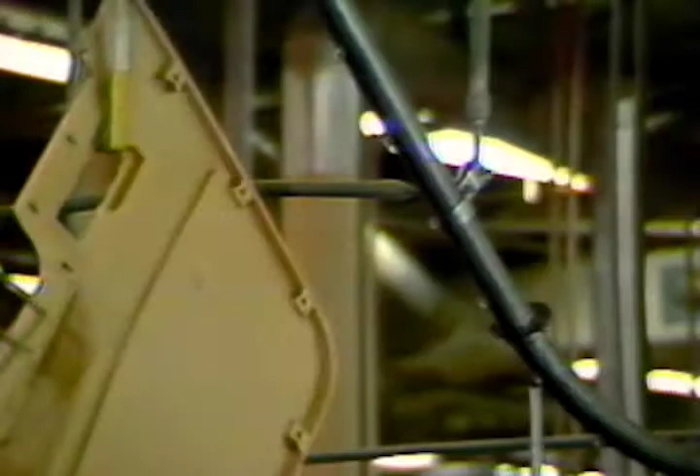Car doors and cardboard boxes, TV sets and table frames, plywood chairs and parcel post, utility meters and steering wheels. Whatever it is, if it has to be moved by conveyor, it's moved most efficiently by Bridgeveyor. The unique Bridgeveyor overhead conveyor system.

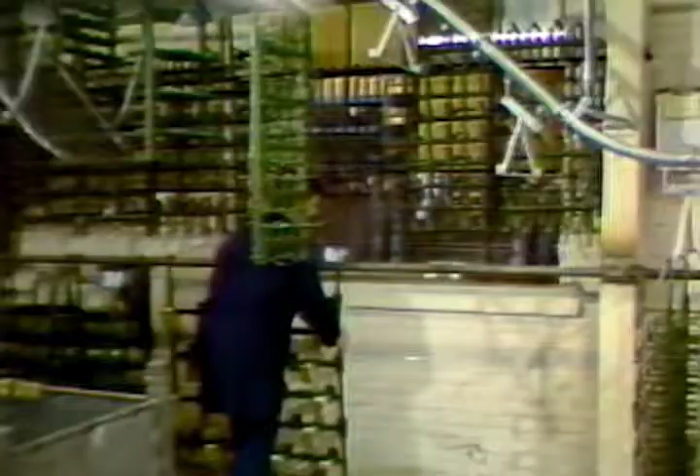Today you'll find Bridgeveyor systems at work in hundreds of installations in Canada, across the United States, in Great Britain, in Europe, and in Asia. And the list of Bridgeveyor customers reads like a who's who of industry. Ford, Volvo, Sangamo, Northern Telecom, Canadian General Electric, Seagram's, Rolls-Royce, Chrysler, Sklar, Canadian International Paper, Black & Decker, Electrolux. The list goes on and on.

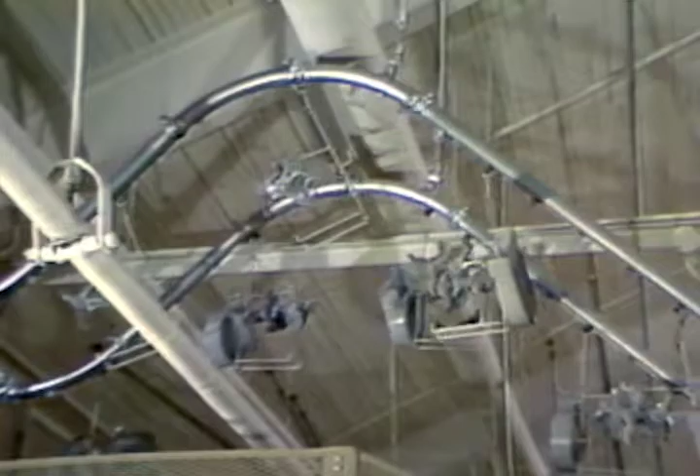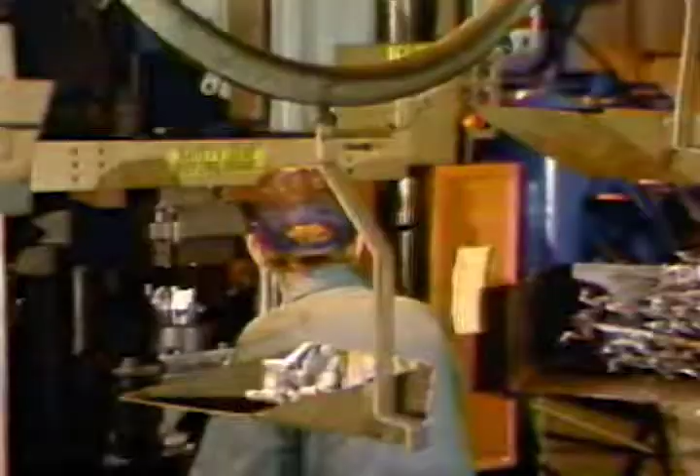The success of the Bridgeveyor system, the reason why it has been accepted by so many major companies on an international scale, begins with two basic facts. First is the concept itself. The concept of an overhead conveyor system as compared to any other method of moving materials and products from one point to another. This overhead concept saves you valuable floor space. It can be applied to virtually any industry, from the biggest manufacturer to the smallest plant. And it handles all types of materials, through all kinds of processes, so efficiently, in fact, that most systems pay for themselves in the first year.

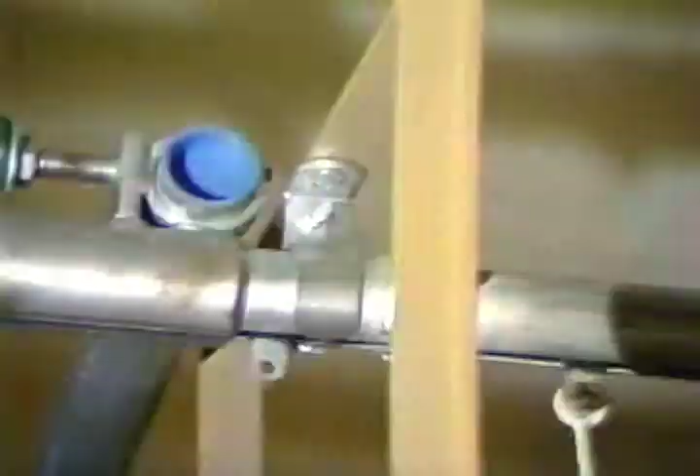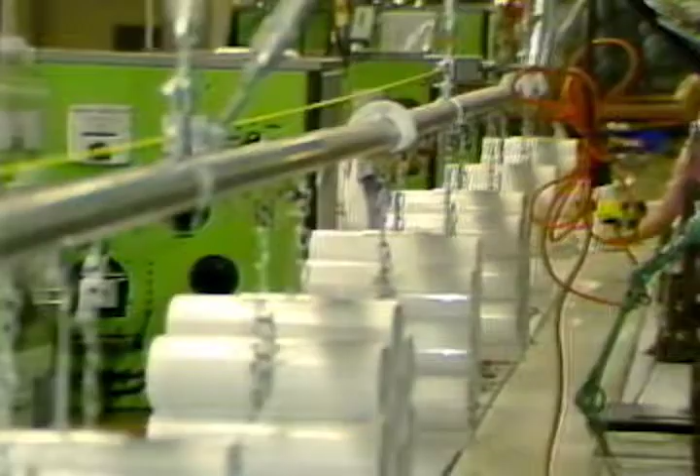The second advantage of the Bridgeveyor system is its unique design. It's a modular system, so simple to install that a customer's own personnel can readily set it up and get it running. It features a unique enclosed track. Chain and bearing surfaces are protected from contamination, dirt, paint, chemicals. This means less maintenance and longer life, and a better return on investment.

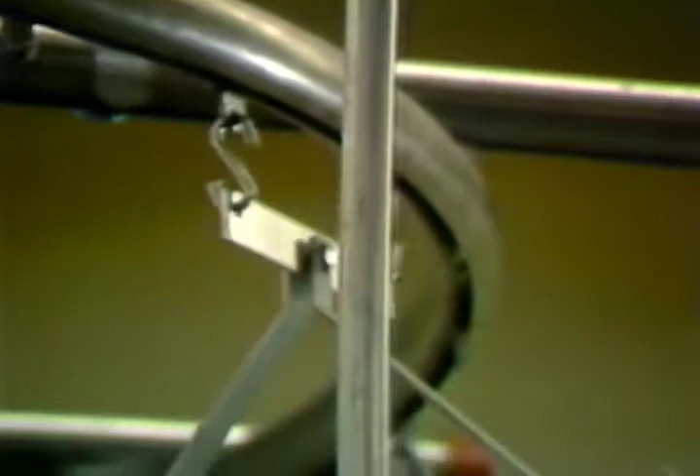The enclosed track also eliminates the need for idler wheels and sprockets on corners. Again, lower costs and less maintenance. And thanks to this enclosed design with no corner sprockets, the risk of injury to plant workers is eliminated.

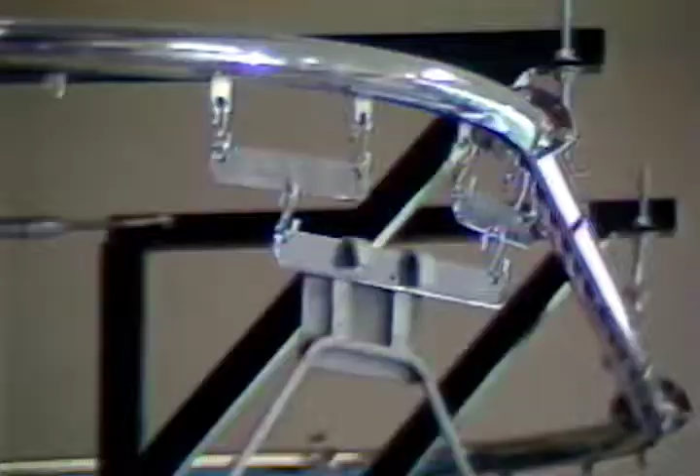Flexibility is important too. Horizontal curves can have standard radius from 36 inches all the way down to 9 inches, so processing tanks, ovens, or freezers can be reduced in size. Special curve sizes are available to order, and many combinations of turns, horizontal and vertical, can be built into your system to make it practical in even the tightest space.

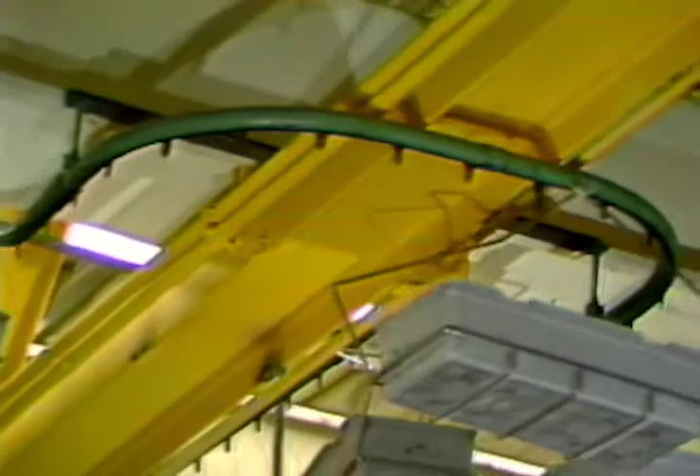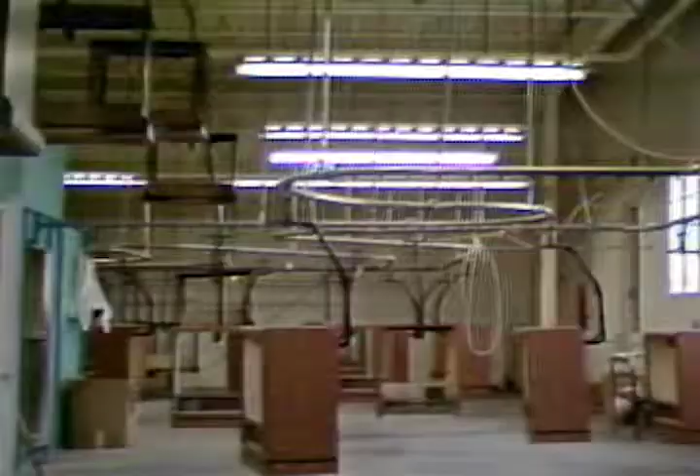Now, how about load capacity? The Bridgeveyor system comfortably handles up to 50 pounds to each pendant. You can double each load to as much as 100 pounds by coupling 2 pendants, or take 200-pound loads by using 4 pendants. So the system's able to handle just about any job you ask of it, right up to a total of 30,000 pounds on a 600-foot system with just one drive.

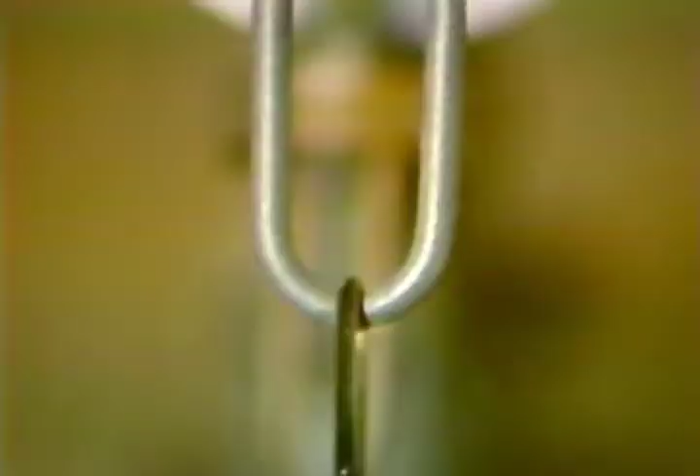Now look closely at the carriers themselves. They're designed to suit each and every application. Indexing carriers for painting, for example. S-hooks. Rotating carriers. Automatic drop-off units. Custom designs to suit your needs. Whatever the material, Bridgeveyor can handle it.

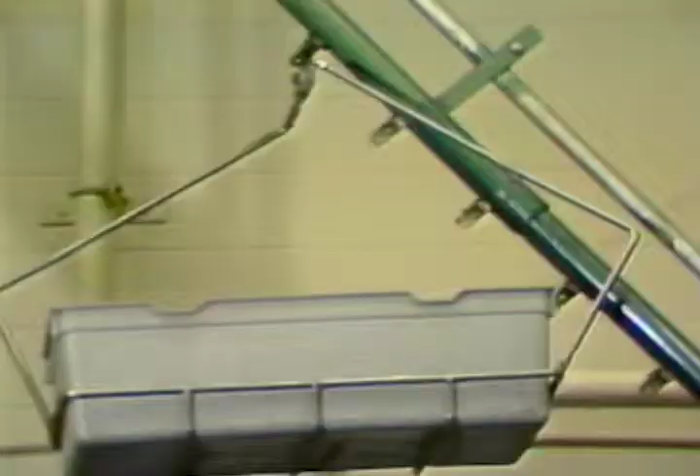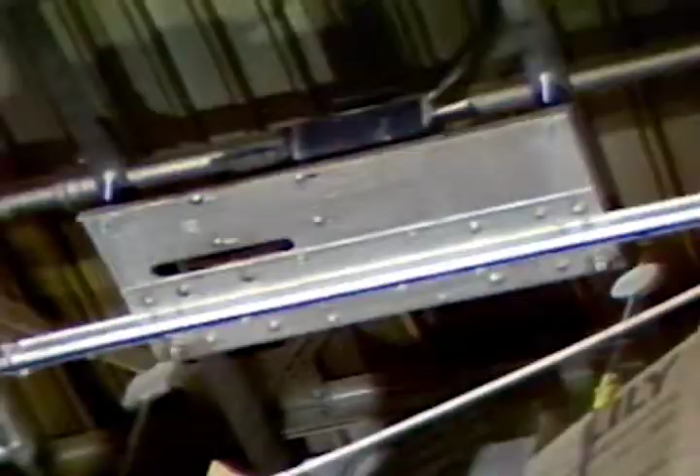Power for the Bridgeveyor system comes from this dependable straight-line Caterpillar D400 drive unit with a chain speed range of up to 80 feet per minute. The drive can be positioned on any straight section of track, wherever most convenient for service and maintenance, as long as it's at the highest possible point. When track length exceeds the capacity of one drive unit, multiple drives can readily be installed, equally spaced through the system.

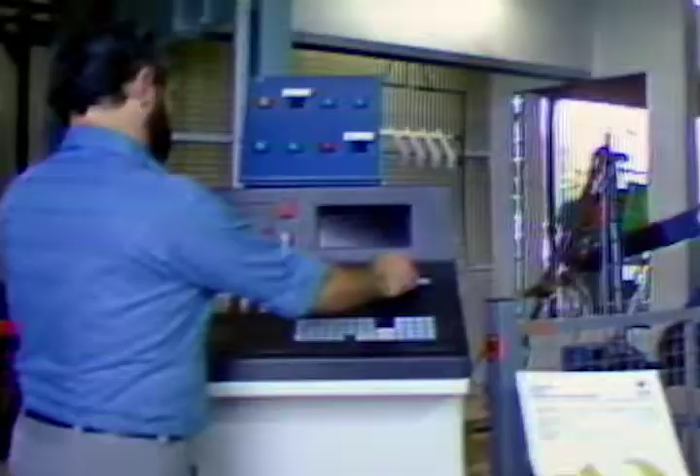Forward, reverse, variable speed, even automatic programming by computer. All these control options can be built into the Bridgeveyor system. Again, flexibility is the objective.

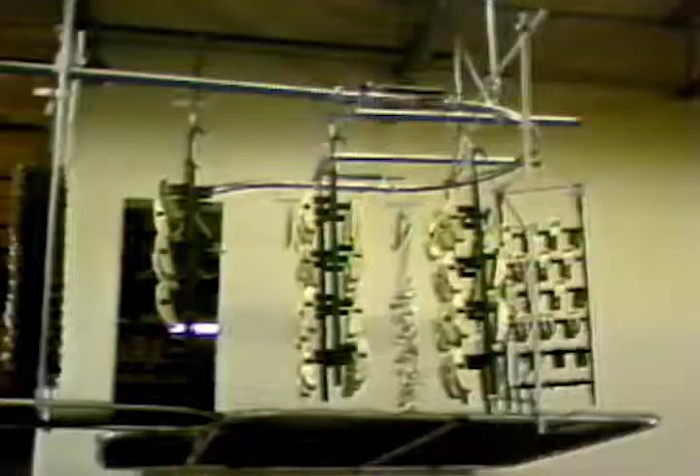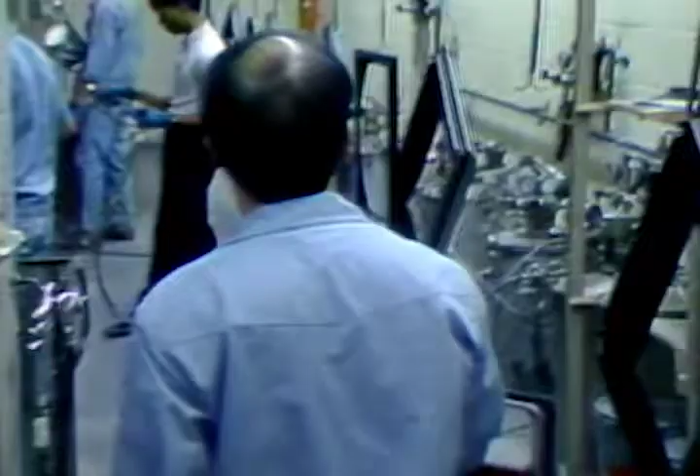And now still another outstanding feature of the Bridgeveyor overhead conveyor, the take-up assembly. Positioned following the drive unit, the take-up maintains a uniform chain tension throughout the system, even where the chain is exposed to the heat of ovens or the cold of freezers. The results, a smooth, free chain flow and minimal operating headaches down the road.

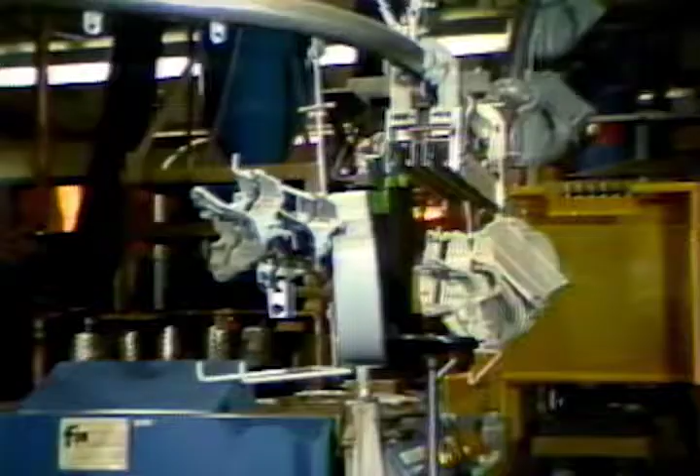So this is the Bridgeveyor conveyor system. Economical, flexible, dependable, and proven for efficiency in literally hundreds of applications. So, only one key question remains. Can Bridgeveyor work for you? The answer's yes. Whether you're looking for process handling, mobile storage, finishing systems, materials transportation, or interdepartmental delivery.

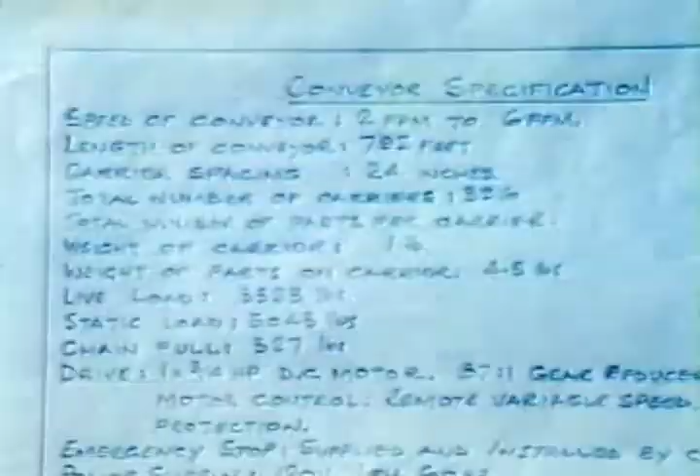It all starts with a Bridgeveyor expert analyzing your operation and your needs. Volume, speed, type of materials, length of system, clearances, environment, plant configuration. Every detail, right down to chain pull factors, is studied, assessed, then taken into account in the design recommendation. Once the costs have been approved, working drawings are produced and agreed on.

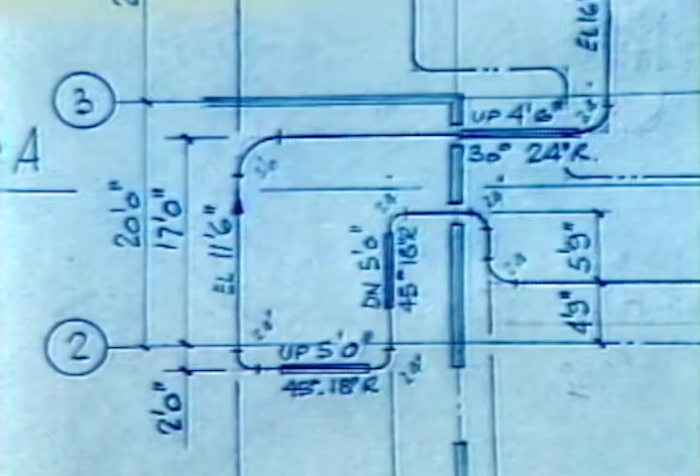The prefabrication of the system components is carried out using our unique bolt-together construction to save you time and money at the site. Finally comes the installation itself, by Bridgeveyor technicians or by your own plant personnel. Whichever method you decide on, you're protected by a full 1-year warranty on every component in the system.

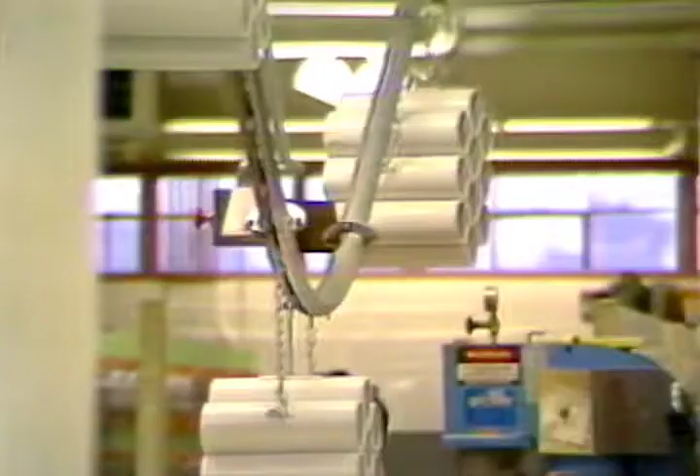So, whatever your industry, whatever your need, look to Bridgeveyor to move your materials better. Bridgeveyor, Canada's #1 overhead conveyor system. For proof, let's look at a variety of actual Bridgeveyor installations.

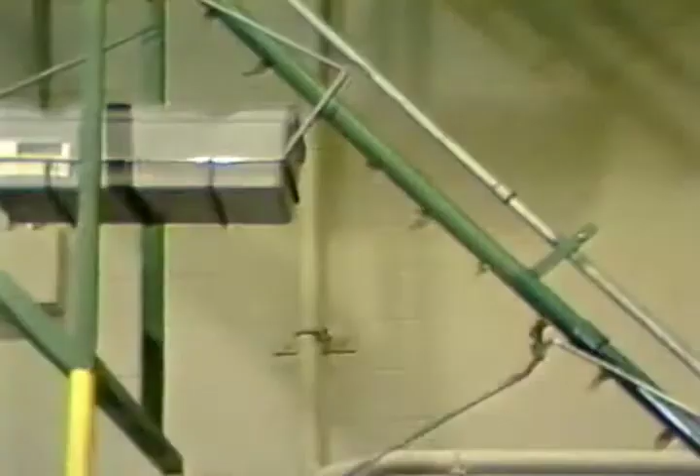Bridgeveyor conveyors have been installed in many of the major postal facilities across Canada. In the Canada Post Gateway Depot in Mississauga, as well as the South Central Depot in Toronto, the Bridgeveyor conveyor system has been operating 24 hours a day, 7 days a week, problem-free since 1976.

At the receiving docks, mail designated for one of Gateway's 36 sorting stations is placed on a floor dolly and moved by conveyor into a monorail system. These flat carts are programmed prior to being fed to the monorail. The coding is done using easily adjusted sliding pins, which engage limit switches to activate the Bridgeveyor conveyor at the required station or truck loading platform.

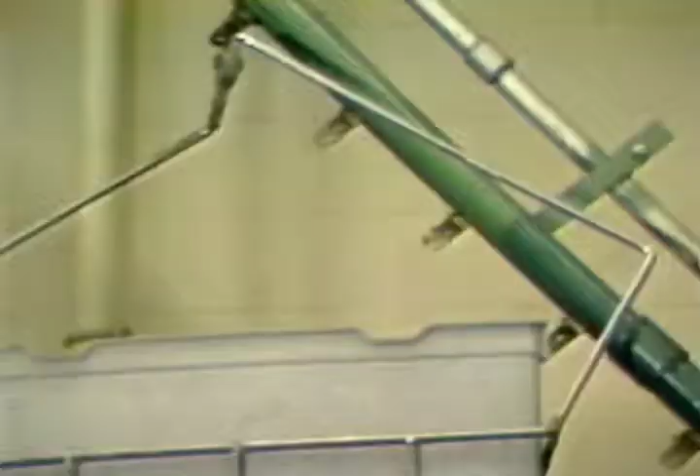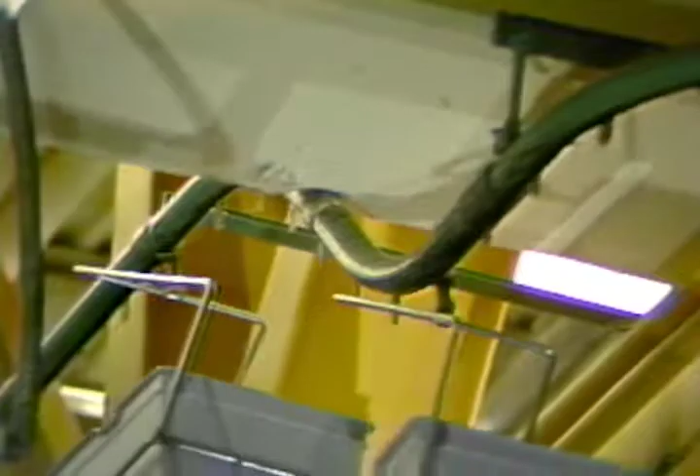Bridgeveyor has specially designed metal frame carriers which allow plastic tote boxes to move freely through various angles and 45-degree curves found throughout the long multi-level system inside the Gateway Depot. Tough layout requirements within the plant were no problem for the Bridgeveyor engineers, as use of tight radius horizontal and vertical curves move the conveyor around any obstacle. Since no corner sprockets are necessary, working conditions are made even safer for employees.

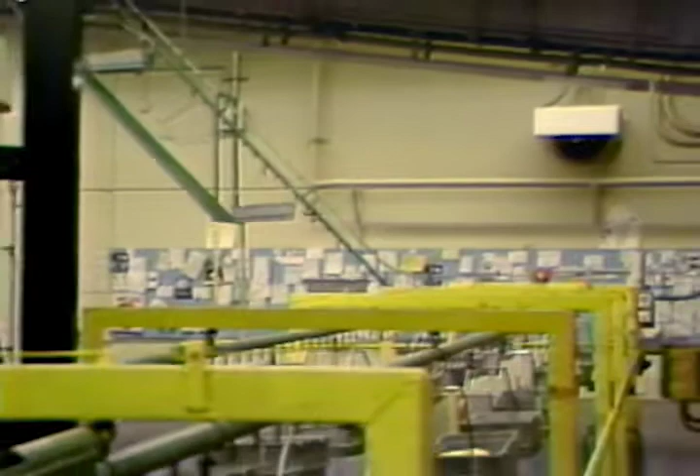Wire mesh is suspended beneath the conveyor to meet Canada Post safety requirements. The drive unit provides a smooth, uninterrupted conveyor flow throughout the system. The Bridgeveyor conveyor system has increased productivity and provided Canada Post with years of trouble-free service.

The Bridgeveyor conveyor system has been operating successfully in this Lily Cup plant since 1982. The key to the success of this overhead conveyor is the valuable floor space left available for other requirements in the plant. Since the conveyor allows the worker to handle only individual boxes rather than bundles as previously required, working conditions have become even safer. The 1,100-foot system moves around corners and negotiates horizontal and vertical curves and inclines with ease, transporting cartons from one department to another.

The numbers positioned on top of each hanger indicate which size and type of carton is required, and the operator can easily attach the box to the specially designed carrier hooks. The smooth and uninterrupted chain flow uses two drive units, which are synchronized automatically by the control box. The speed of the conveyor can be easily adjusted to suit the required production rate.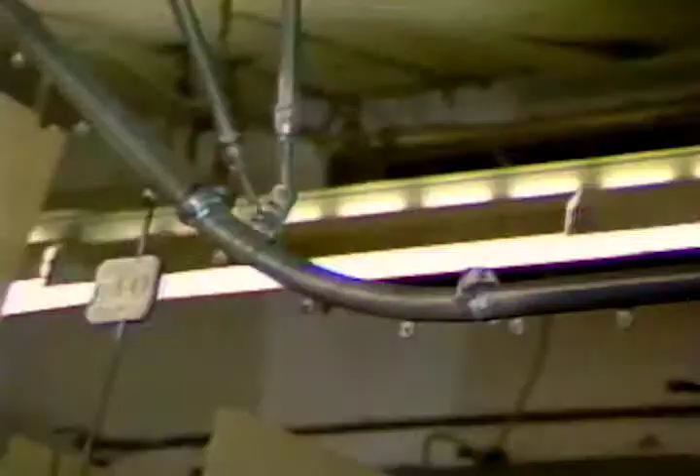The take-up units, which maintain an even tension of the chain, use a standard 36-inch radius, allowing the cartons to move easily around the turn and proceed through the doors in the ceiling. Where applicable, the conveyor is conveniently attached to the underside of the roof trusses, requiring no bracing and minimizing the number of steel hangers required to suspend the conveyor. The Bridgeveyor conveyor has been operating within Lily Cups throughout various shifts since 1982. It's been deemed such a success that our overhead conveyor system is now being considered by other Lily Cup plants.

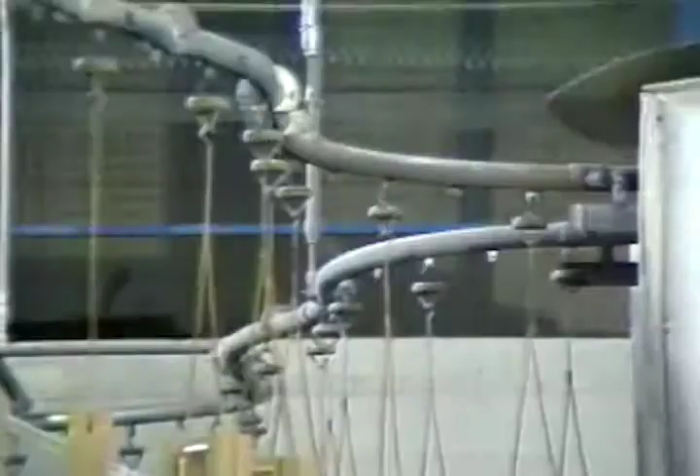The Matsushita Company of Canada installed the Bridgeveyor conveyor system in 1978 to increase productivity on their television cabinet assembly line. The original conveyor system was over 1,800 feet long, and over the years the company has added 3 additional conveyor lines, each powered by its own drive unit and totaling almost 4,000 feet of conveyor.

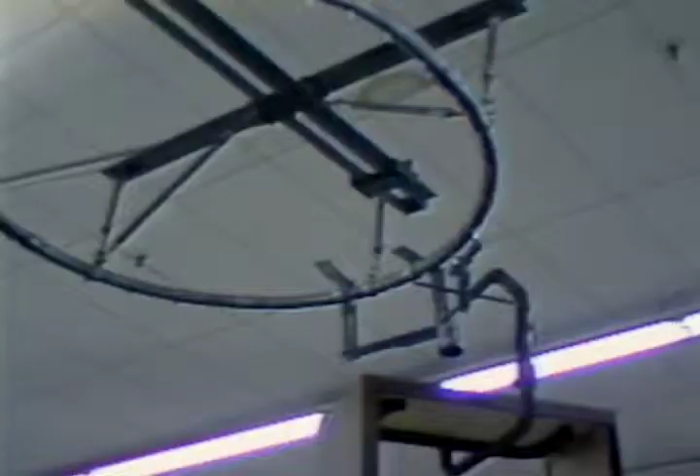The cabinet transfer line is 770 feet long. This conveyor automatically picks up TV cabinets from the cabinet assembly conveyor and moves them on specially designed rotating carriers up to the next floor, where they are placed on a storage conveyor. Conveyor number 2 is the cabinet finishing line and runs a total length of 2,300 feet. The TV cabinets are moved through 5 spray booths on rotating carriers, which ensure smooth and even painting.

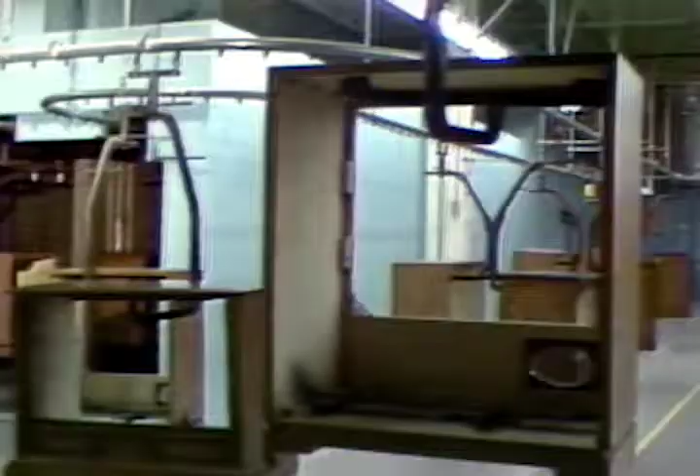After painting, the cabinets travel on the conveyor through an oven, which bakes the paint for 12 minutes at 175 degrees Fahrenheit. Exiting the oven, the conveyor moves the cabinets by automatic transfer to accumulation storage. Bridgeveyor's unique design minimized the surging factor in this 1/2 mile system and ensures a steady, even flow of the conveyor.

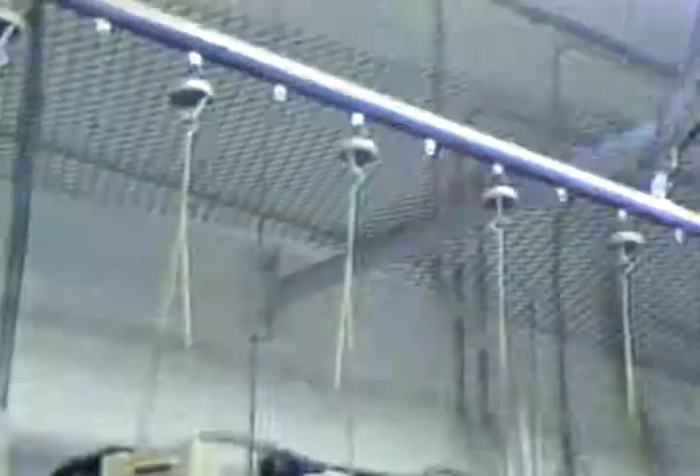The 400-foot paint line in conveyor number 3 is used for painting plastic parts used in the cabinets. Each rotating carrier carries 2 plastic parts through a fog tunnel, where the parts are sprayed with a water-soluble conductive solution, making the plastic conductive before it's painted. The conveyor and the carrier hooks are both grounded.

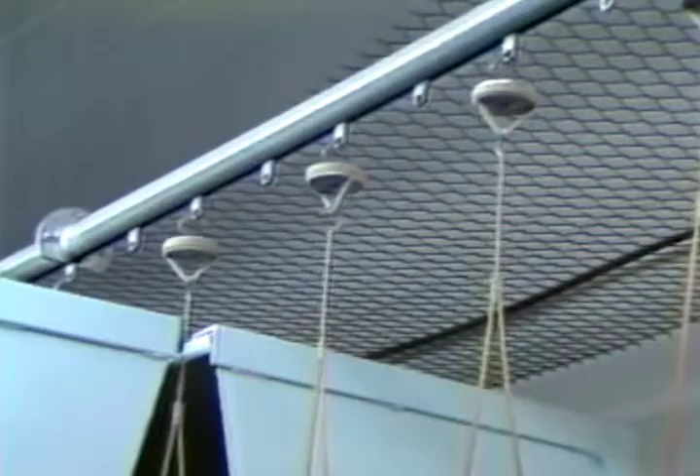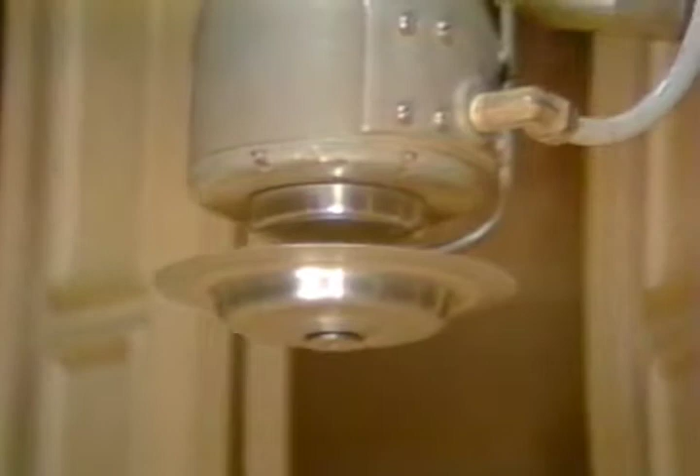The parts now enter a Ransburg paint booth. The paint is charged at 100,000 volts and is sprayed on the hanging parts by a high-speed rotating disc which moves up and down the length of the plastic part. The painted parts are conveyed through an infrared oven for final curing. This ceiling-mounted oven is used for the paint drying of conveyors 3 and 4.

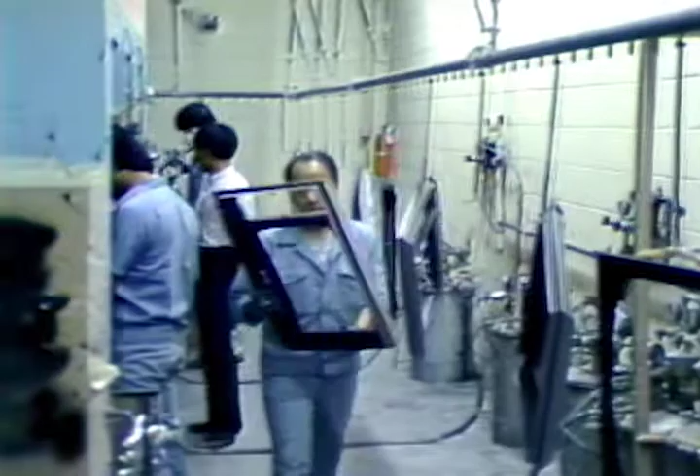Conveyor number 4 is the mask decorating line and is 500 feet long. It moves the plastic frames of the TV cabinets past 5 spray paint booths. Each spray operator removes the particular part he paints, fits it in the painting fixture, and places the painted part back on the conveyor, where they are moved to the infrared oven for drying. Bridgeveyor's enclosed track design is able to protect the chain and bearings from paint, chemicals, and ovens.

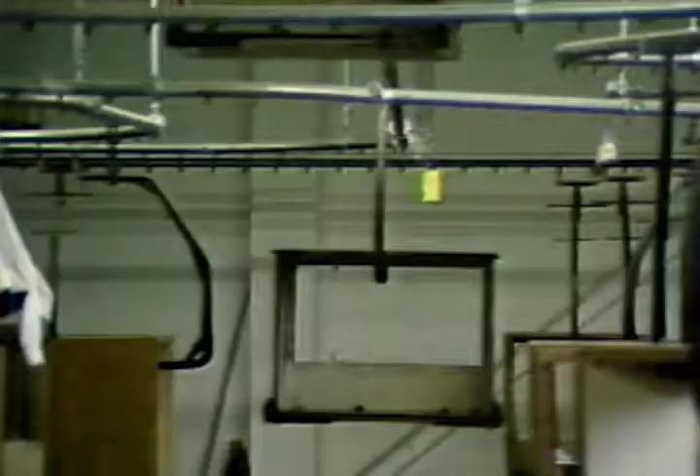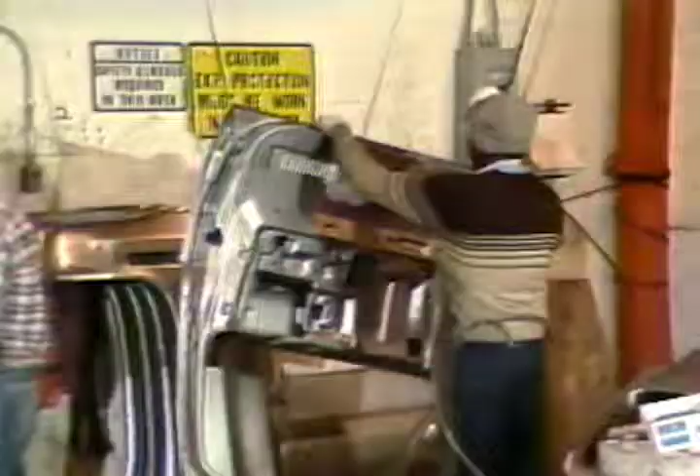The Bridgeveyor conveyor system has increased the overall efficiency at Panasonic so that their normal production rate has now exceeded 1,200 cabinets during each 8-hour shift. Bridgeveyor conveyor systems use an enclosed track design in which the conveyor track is able to move through corrosive chemicals, paint, and dust with complete protection. The success of this design can be seen in large automotive factories such as Chrysler and Citroën.

This Chrysler factory in Ontario supplies automobile door parts and panels to Chrysler plants in Canada and the United States. Valuable floor space is left available for other uses, such as packaging and assembly stations, as the automotive parts are carried through the plant on the overhead conveyor.

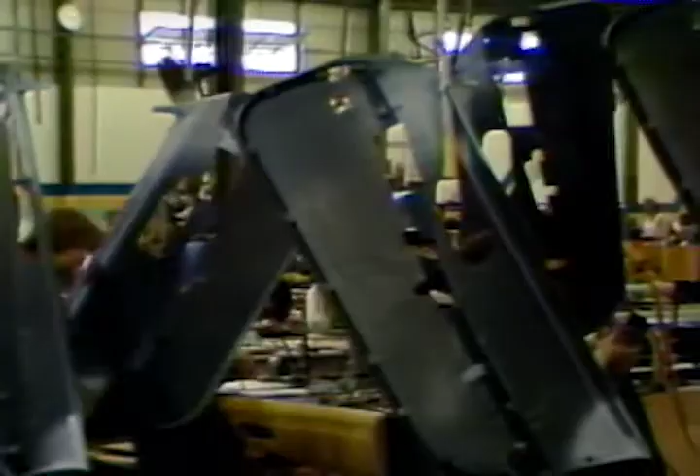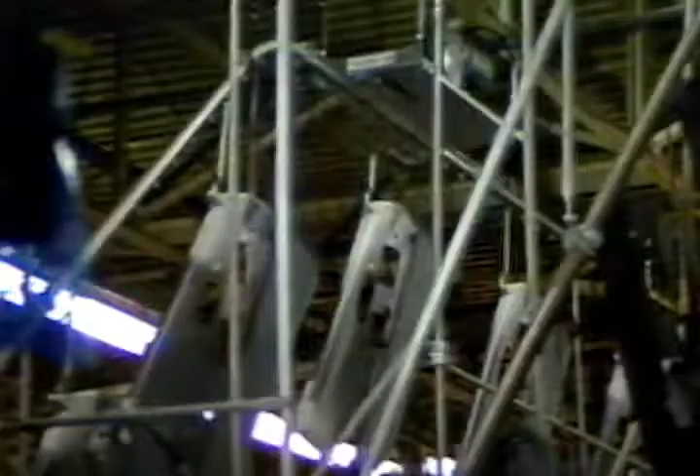At Chrysler, the conveyor system operates 5 days a week during two 8-hour shifts each day. The large door panels are conveyed easily around tight curves and steep inclines as they move by each required assembly station. The conveyor moves at a smooth, steady rate of speed, and the predetermined pace can be adjusted according to production needs. The Bridgeveyor conveyor system has been operating successfully in the Chrysler factory since 1983.

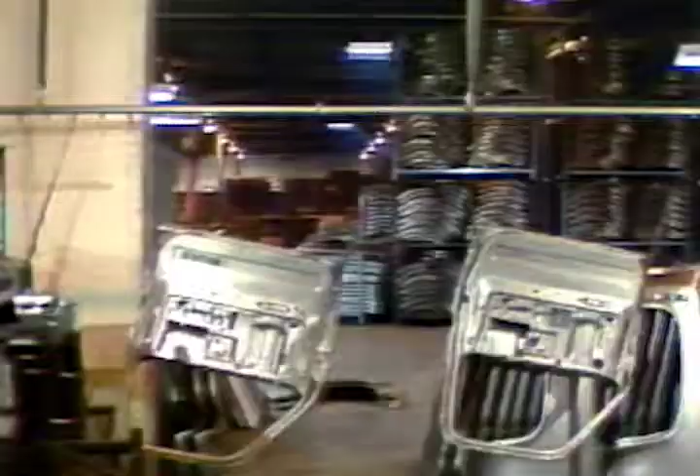The Citroën plant in Concord, Ontario, manufactures car doors, fenders, and hoods for such companies as Ford, General Motors, and Chrysler. The 1,500-foot conveyor moves at a predetermined production speed of 20 feet per minute. Citroën uses a multi-drive conveyor system with an electronic shear pin overload protection feature. The parts are conveyed through a 5-stage zinc phosphate wash and rinse cycle and then travel for 14 minutes in a 350-degree dry-off tunnel.

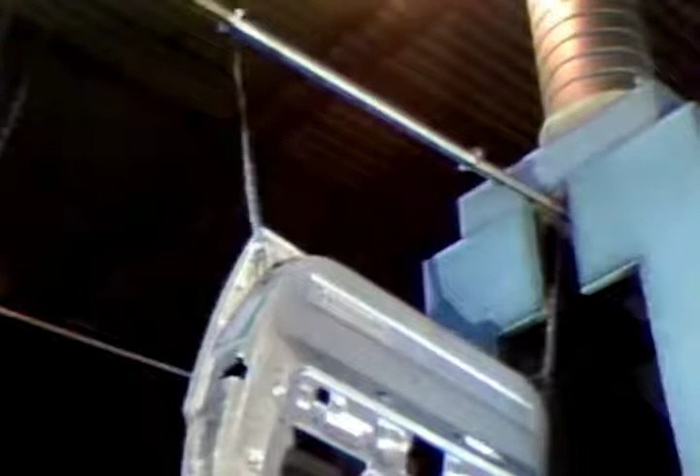The conveyor moves the parts from the tunnel to a dip tank where the parts are completely immersed in a primer coat of paint. These painted parts are baked as they travel through a finishing oven to complete their cycle. The Bridgeveyor system has improved safety conditions in plants such as Chrysler and Citroën, as well as increasing overall production.

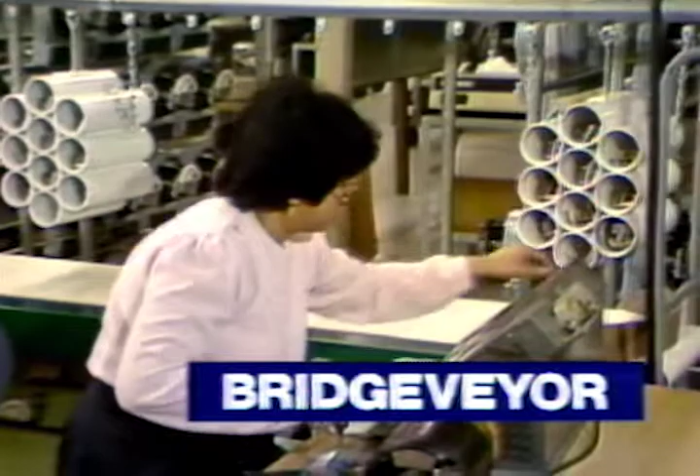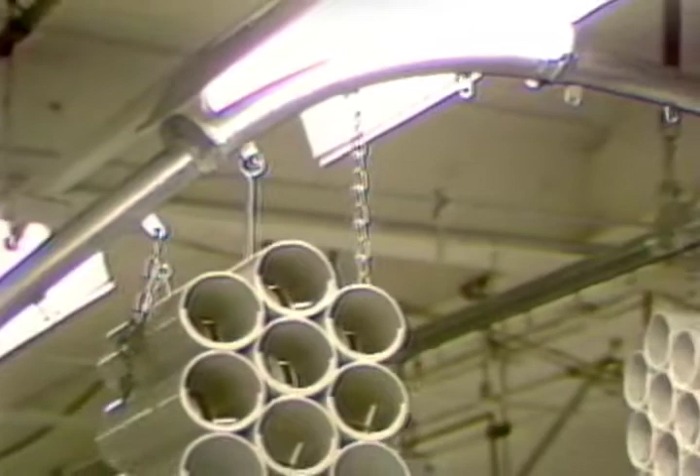Chosen because of its quiet, clean, and smooth operation, the Bridgeveyor conveyor system has been operating in Sangamo's Toronto plant since 1982. Supplying the Canadian market with electrical meters, Sangamo had the overhead conveyor system installed to improve the plant's overall efficiency. 4 conveyors operate throughout the Sangamo plant. On the final test and assembly conveyor, the meter parts are conveyed throughout the plant in a unique product carrier which was specially designed to suit Sangamo's needs.

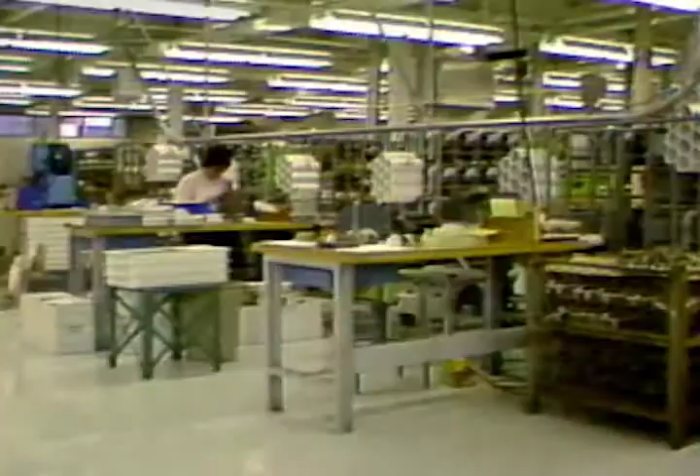The vertical curves use a small radius which makes it possible for the conveyor to dip down to individual workstations and then elevate back up and out of the way, freeing valuable floor space. These carriers continually circulate on the overhead conveyor, and operators at assembly stations remove various parts for testing. When the tested parts meet all of Sangamo's requirements, they are placed back on the product carrier in the specified slot and move on to the next station of assembly.

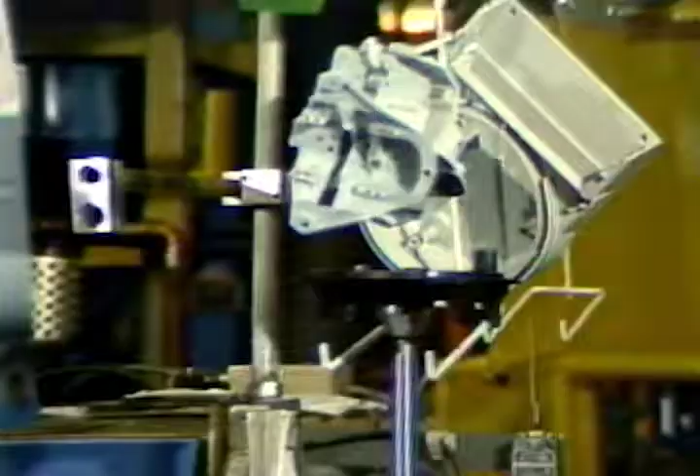The parts supply conveyor for meter assembly is 792 feet long and circulates 396 carriers. It provides assembly stations with a constant supply of meter parts. The die-cast conveyor moves parts from the die-cast department on specially designed carriers, which automatically drop the cast parts into a vibrator. The vibrator is full of sand and moves at an accelerated rate, smoothing and polishing the parts so that they are ready for assembly.

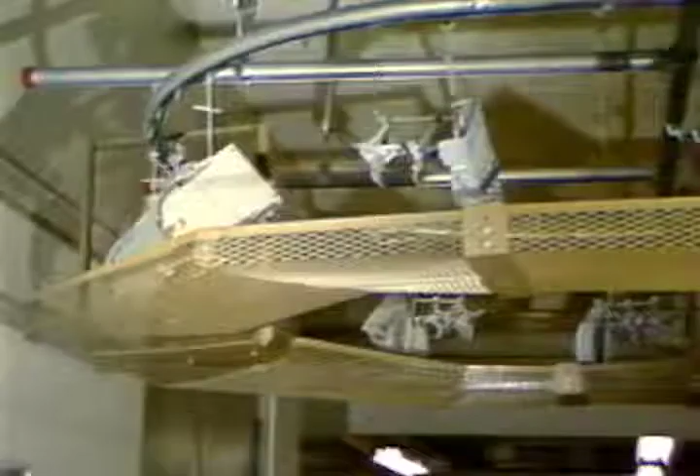A safety shut-off line has been installed along the length of each conveyor for the convenience of the operators. The conveyor track easily supports the wire mesh protecting the workers below. The Bridgeveyor conveyor, designed to meet all of Sangamo's production requirements, was installed quickly and easily. The prefabrication of the conveyor system eliminates the need for any welding during installation.

Right and left-hand threaded rods provide a turnbuckle for ease of leveling track during installation. Beam clamps adjust to different sized beams, and track hanger clamps are used for easy hanging and bracing of the conveyor track. The ease of design adaptability is evident throughout the Sangamo plant.

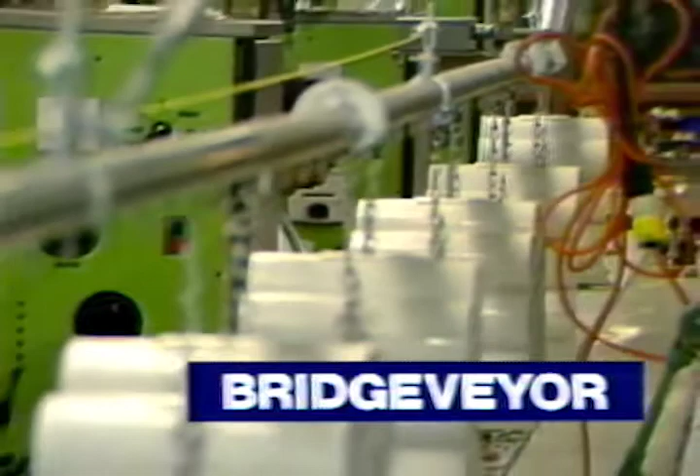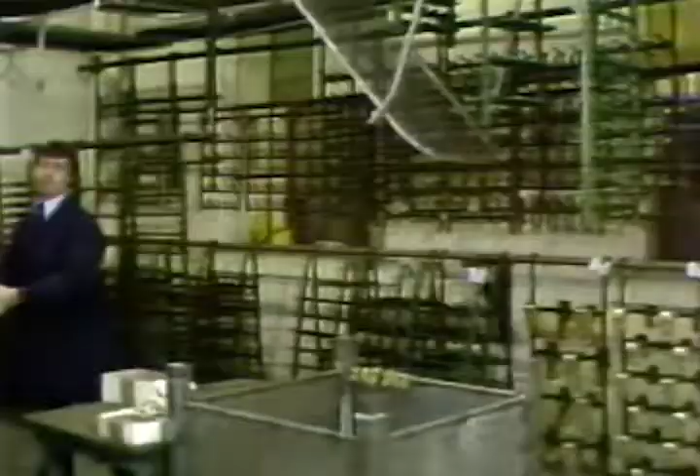The Bridgeveyor conveyor system has been operating in this Sargent's plant since 1979. The company plates industrial parts for doors and required Bridgeveyor to design a special carrier to move the door parts efficiently and easily. At the loading station, the parts to be plated are placed on the carrier, which is conveyed up a 45-degree incline to a door in the ceiling.

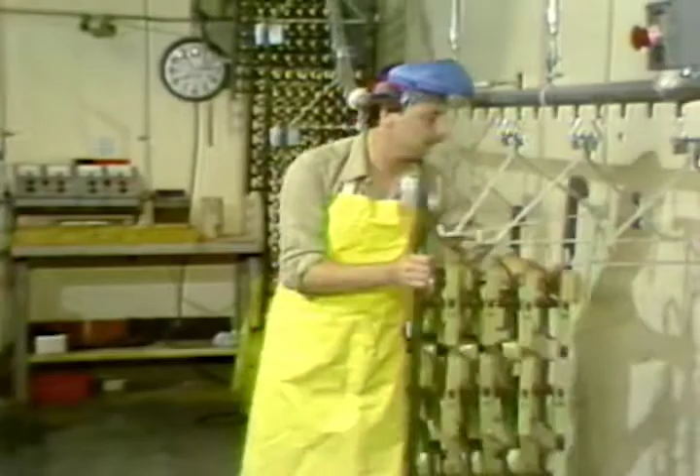In the plating room, the conveyor returns to floor level, allowing the operator to easily remove the racks. Several racks are placed on a rack hoist, which moves the racks down to plating tanks. When the plating process has been completed, the racks are then placed back onto the conveyor, where they proceed to the unloading and packaging station.

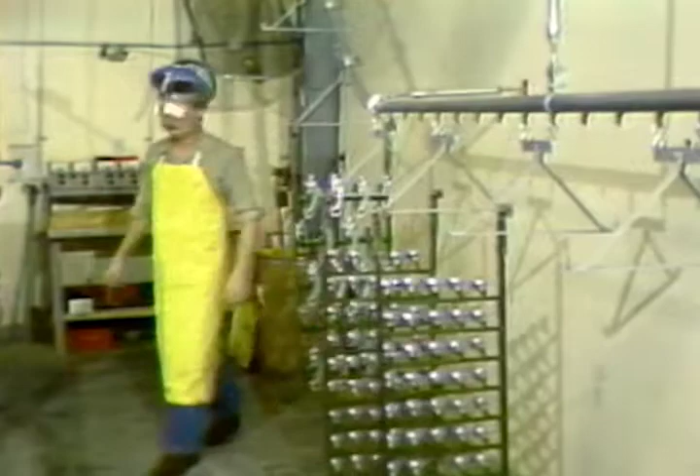The conveyor moves at a slow speed for the safety of the workers handling the parts. Bridgeveyor installed a safety wire mesh to protect the operators against any falling parts. The Reliance SCR variable speed control allows the conveyor's speed and direction to be changed manually.

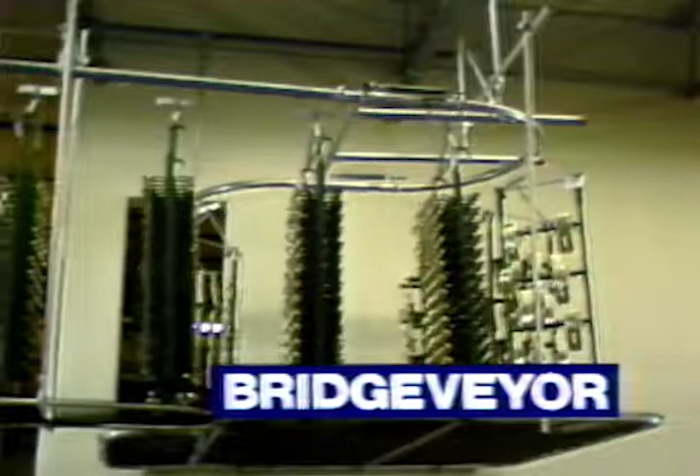The enclosed track design protects the chain from the chemicals encountered during the plating process at the Sargent plant. The Sargent's company has found that the Bridgeveyor conveyor has enabled their production capacity to handle any increases in production demands.

Curve Ply, Canada's largest manufacturer of curved plywood products, installed the Bridgeveyor conveyor system in 1980. Curve Ply uses two separate conveyor tracks for finishing, loading, and unloading purposes. One is 800 feet long and the other 400 feet, both moving at 6 feet per minute.

After being loaded on the specially designed carrier, the various wooden parts are sprayed with sealers or lacquers. Indexing carriers enable the operator to easily rotate the parts, ensuring a smooth, even coating. The enclosed track design protects the conveyor chain and bearings from contamination by varnish and dust.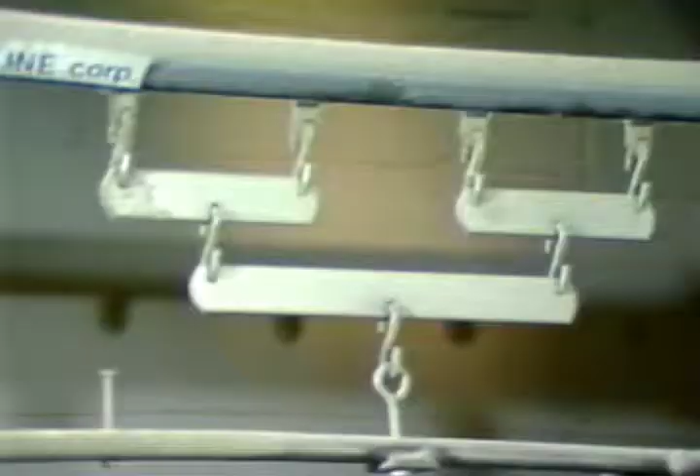Once sprayed, the parts travel through an oven where they are dried and baked at 150 degrees Fahrenheit. Large racks designed by Bridgeveyor to meet Curve Ply's unique needs are moved easily along the conveyor system and through the tight turn in the oven. The double four-pendant carriers enable the conveyor to move weights of up to 400 pounds.

Due to the low profile of the Series 250 conveyor, the oven size could be reduced considerably, saving Curve Ply space and costs. Prefabrication of the conveyor also saved Curve Ply time in installation, as no overhead welding was required. The overhead conveyor system leaves valuable floor space available for the large packing materials required at Curve Ply.

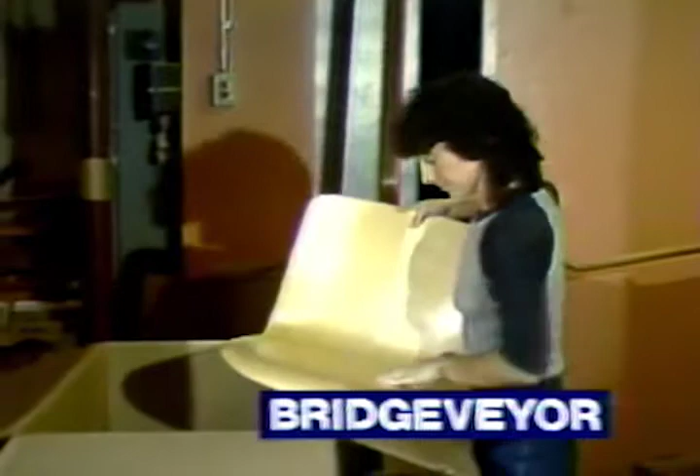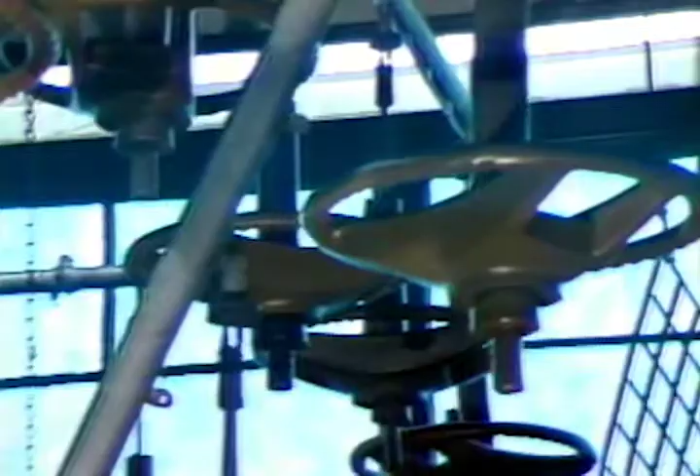Two Bridgeveyor conveyor systems operate within the Scheller Globe plant in Brampton, Ontario, where steering wheels are manufactured for major North American automobile companies. The systems are 700 feet long and operate side by side. They have been operating successfully since 1979, 24 hours a day, 7 days a week.

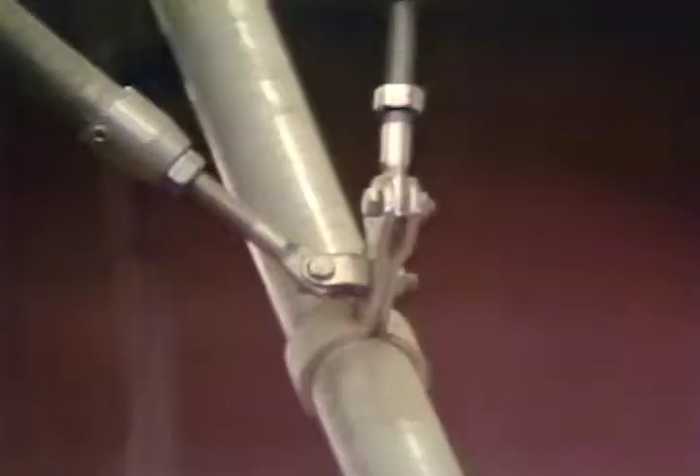During this time, Scheller Globe has repositioned and added equipment to their plant, requiring Bridgeveyor to change the flow of the conveyor several times. This was done easily and quickly because of the standardization design of the conveyor track connections. After passing by 3 loading stations, the parts are conveyed through an emulsifier spray tunnel. They then pass through a 150-degree 4-stage wash and rinse cycle and move on to a deionization water rinse and drying tunnel.

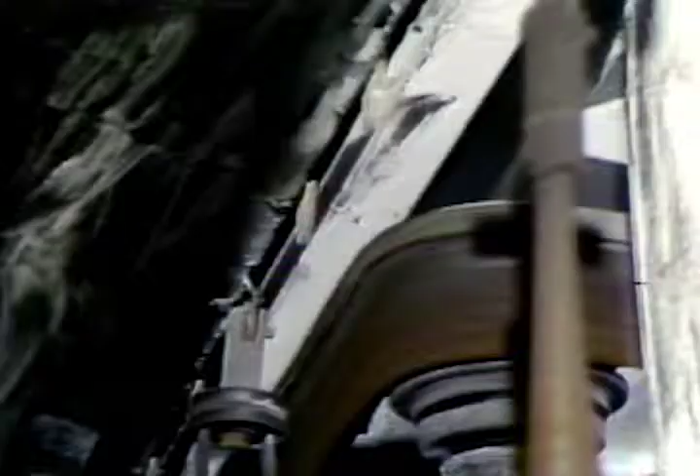The steering wheels are automatically rotated by a V-belt coming in contact with the rotating carriers as the parts are moved in front of the spray guns. The parts then move up a 45-degree incline and pass through a 450-degree oven installed on the roof of the plant.

The steering wheels are then conveyed back down to floor level for the finishing coat of paint and returned to the oven for final baking. The finished steering wheels decline to floor level for easy unloading and packing. A variable speed drive allows Scheller Globe to adjust the conveyor speed to meet their production requirements. The Bridgeveyor conveyor system was designed to suit the specific production requirements found at Scheller Globe and has increased their overall efficiency and production rate.

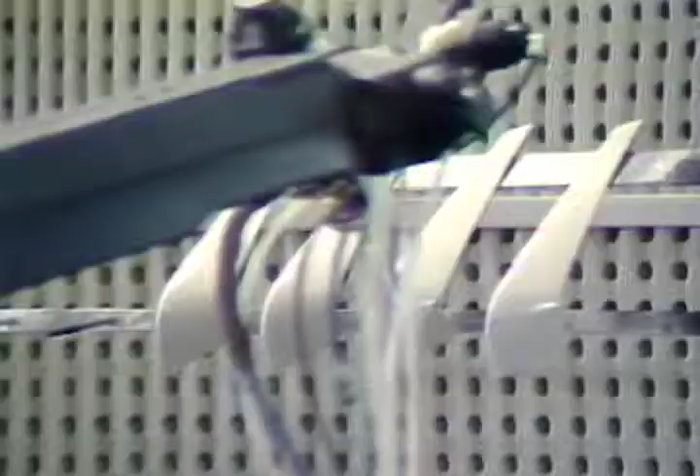The Ontario Robotics Centre in Peterborough uses the Bridgeveyor conveyor to move various parts past an industrial spray paint robot. The Bridgeveyor conveyor is able to interface with all industrial robots. The variable speed controller enables one operator to adjust the speed or direction of the conveyor according to production requirements. The enclosed track design protects the moving chain from paint and chemicals.

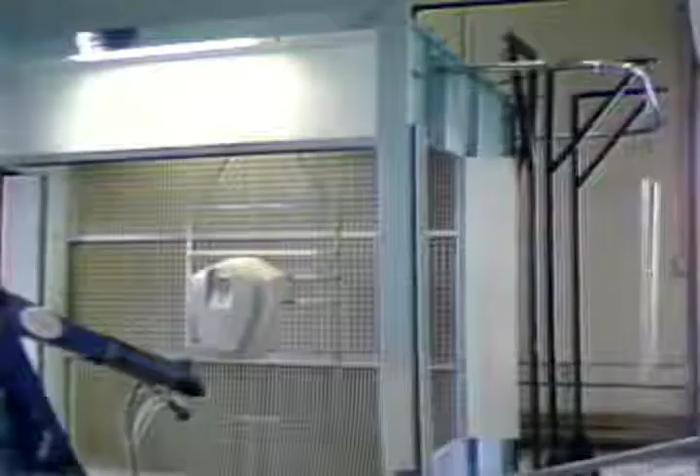The design of the drive unit and take-up assembly allows the conveyor chain to maintain an accurate pitch while minimizing the stretch factor. Easy installation and quiet, smooth operation make the Bridgeveyor conveyor ideal for all of the Robotics Centre's needs.

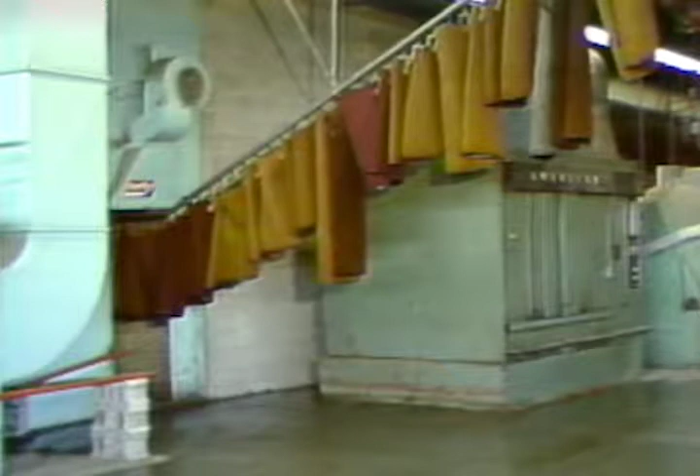In 1976, Bridgeveyor installed their overhead conveyor system in the Canadian dust control plant. One conveyor system is able to handle all of the plant's requirements as it moves soiled carpets at a low speed through a wash and dry cycle. Exiting the washer, the carpets are moved to an unloading area where workers remove the carpets from the conveyor. Specially designed carrier hangers enable the operators to load and unload the carpets easily.

The conveyor uses two drive units which are synchronized by a single V1600 remote variable speed AC controller contained in one cabinet. This facilitates load sharing for two or more D400 drive units located separately within a continual strand of Bridgeveyor chain, all of which are individually protected from any jamming situation with the use of an instantaneous trip relay or shear pin protection.

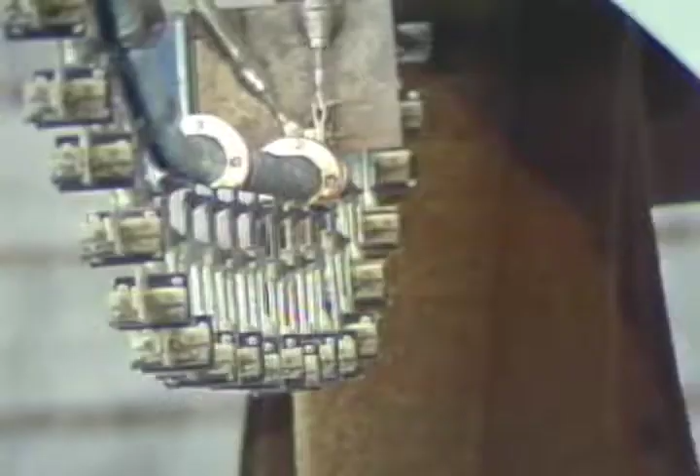Daily production output at the plant has been substantially increased by the use of a double-tier conveyor line. This line moves through 180-degree turns with very tight 16-inch radii within the dryer enclosure. This conveyor line design has allowed completion of the day's work to be reduced by as much as 3 hours from the usual 8 hours as in the past. The conveyor system has also eliminated the use of costly industrial washers and dryers, which were found to be slow as well as costly to maintain.

At the Woodhill Garden Centre in Toronto, the Bridgeveyor overhead conveyor is used as an eye-catching display unit. Installed in 1980, the conveyor moves a variety of plants along the length of the store for customers to view. The Garden Centre has found that as well as increasing their sales, the conveyor allows more floor space for indoor plants and can be used as an automatic watering device.

Retail outlets appreciate the Bridgeveyor conveyor because of its smooth, clean, and quiet operation. The enclosed track allows the conveyor to move delicate plants without any chance of the plants touching a moving chain. The bright yellow paint enhances the conveyor and makes it highly visible from the outside. Retail outlets have found that a Bridgeveyor conveyor system not only saves them valuable floor space, but labor as well.

The Kinetics plant in Rexdale, Ontario manufactures tubular frame furniture for industrial use. The plant uses 2 Bridgeveyor conveyors which have been operating for 4 years. The finishing line conveyor is 400 feet long and can move at speeds ranging from 2 to 6 feet per minute.

The first operation that the parts pass through is a degreaser, which is a single-stage washer using an iron phosphate wash heated to 140 degrees Fahrenheit, where the parts are dried and heated in preparation for the powder spray coating stage. After being sprayed with an electrostatic powder, the parts travel through a 60-foot-long bake oven heated to 400 degrees Fahrenheit.

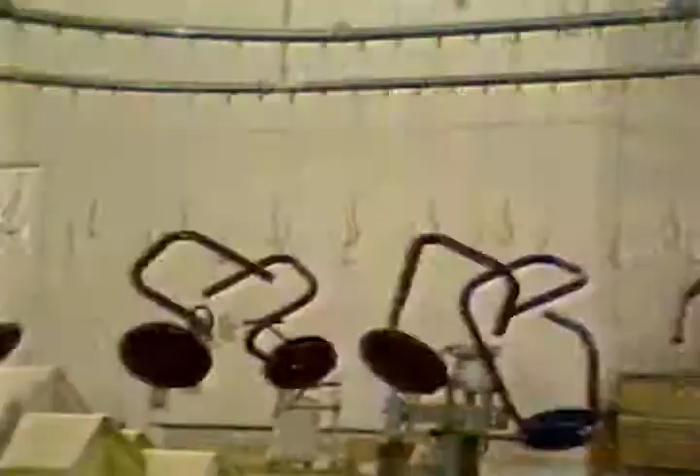The conveyor makes a 5-foot-wide loop and extends 84 feet into the production and storage area where the parts are loaded and unloaded. The second conveyor moves the finished parts from the storage area to assembly stations. This conveyor is 300 feet in length and moves quickly at 47 feet per minute.

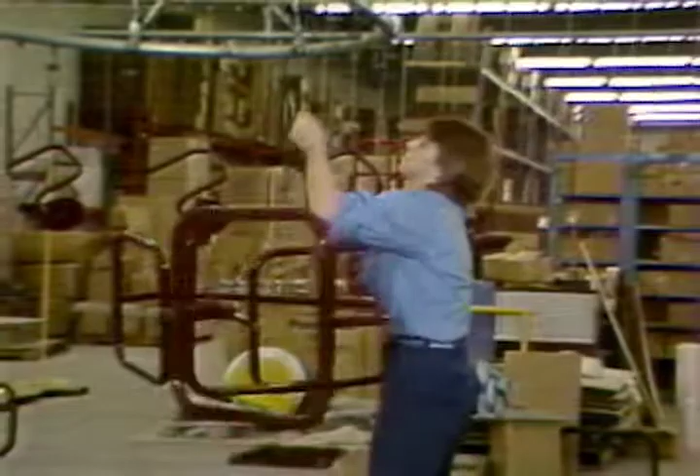The specially designed carriers move the large furniture frames easily around the curves and inclines found throughout the Kinetics plant. Traveling within an enclosed track, the conveyor negotiates corners without the use of sprockets, creating safe working conditions for the hands-on work required at Kinetics. The speed of each track can be adjusted to meet production requirements. The Bridgeveyor conveyors within the Kinetics plant have improved safe working conditions and increased plant efficiency.